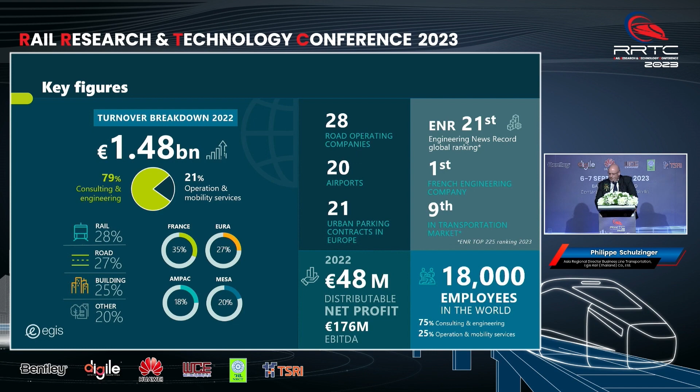In terms of Egis's global offer, we can service our customers and work with partners for the full life cycle of any project related to transport infrastructure, urban development, and energy and industry. So from feasibility studies toward the full implementation of a project, and as I said earlier, in terms of operation and maintenance, we provide services too.

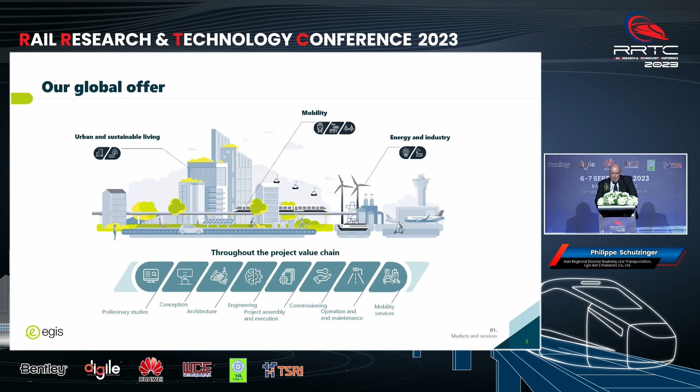In terms of our local footprint in Asia Pacific, we are present in Asia since 1955, and today we have about 2,000 employees in the region. What is very important for us in relation to Thailand is that Thailand is our transportation regional hub. We've been present here for more than 30 years, with about 120 staff working mainly in rail and civil infrastructure works. We also have a team developing MEP and urban architecture activities.

What's important to know is that for Thailand, we are a regional hub, but also, for the rail and civil activities, since last year we've provided more worldwide support for Egis Group. So today we are supporting regions like the Middle East, Europe, and also Latin America from Bangkok. Roughly 80% of our staff in Thailand are from Thailand, and the remaining 20% are of different nationalities, bringing different experience.

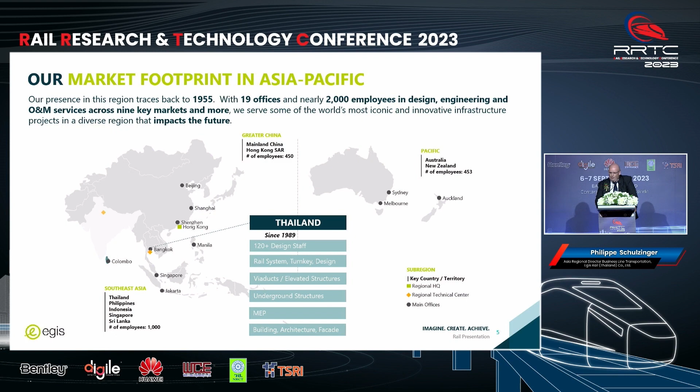So in terms of LRT systems, I wanted to share what LRT is, what the different advantages are in terms of system, how we break down the different components, and also share some experience about operation and maintenance.

First, the objective of an LRT system. I'm sure many of you know these pictures about the representation and comparison between cars, without cars, and a tram for transporting, for example, 200 people. If you see the picture on the left, 200 people is about 177 cars on average, representing quite major traffic. On a light rail train, shown on the right, if you put this same amount of people, in terms of footprint and transport capacity, it makes a big difference.

So the objective of the LRT system is to reduce the number of cars in the city, meaning reducing pollution, reducing noise impact, and of course reducing the time for people to commute from point A to point B. It will also improve the quality of living in the urban environment in terms of accessibility for people moving, and in terms of social and economic benefits. Transport quality will also be improved in terms of reliability, speed, comfort, and capacity.

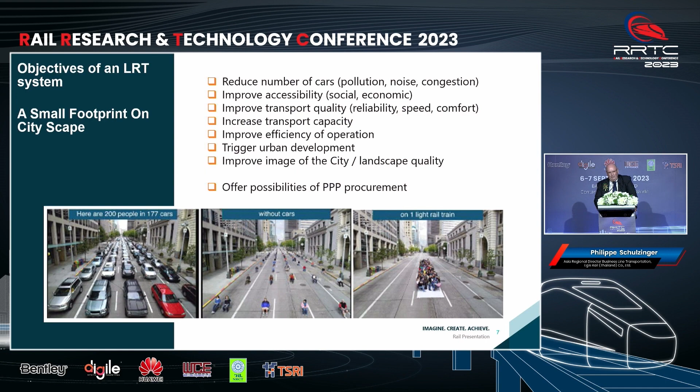In terms of characteristics for segregated systems, you can see on the two pictures that with the segregated system we can increase speed for the transport. It will also give priority in traffic, so it will be more reliable in terms of timetable for the tram. In terms of capacity, it will improve the headways, and we can provide longer vehicles on a segregated corridor. Again, in terms of attractivity, it's more accessible, silent, and part of a network in terms of connectivity.

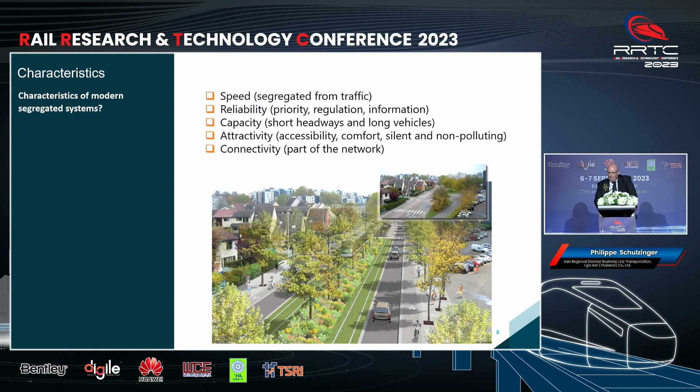Also interesting to acknowledge is energy efficiency, comparing tram with diesel bus and electrical bus. Studies comparing similar passenger capacity show that energy for tram is still more efficient per passenger versus diesel bus. You can see the graph in the middle showing energy consumed for acceleration and cruise energy, and also for electrical bus. This can be explained mainly by the coefficient of resistance comparing a steel wheel on steel rail with a tram versus rubber tire on roads.

So in terms of energy, that's the point we need to bear in mind when we look at mobility and transport planning for Thailand, also with a target of decarbonization and energy efficiency.

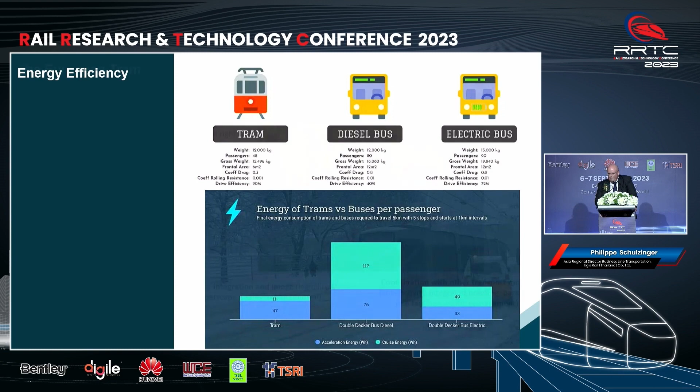We have public address systems in the different tram stops, and typically in Europe it's quite connected with other transport modes. In terms of ticketing, we have cities using the same fare collection system from tram to metro to bus.

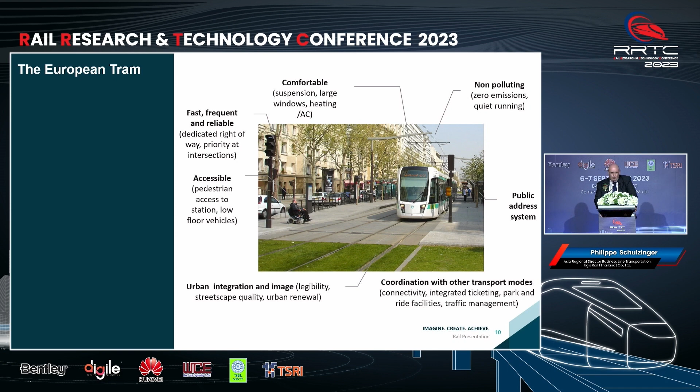In terms of typical components, we can break it down into three components. The first is infrastructure, which can be fully or partly segregated, and we can have any type of infrastructure in relation to the tram—at grade, underground tunnel, or elevated. The second component is rolling stock, which determines capacity, performance, comfort, and also reflects the image of the city through its design. Then we have the rail systems, which provide information, telecommunication systems, mainly traction power systems, and the track and signaling.

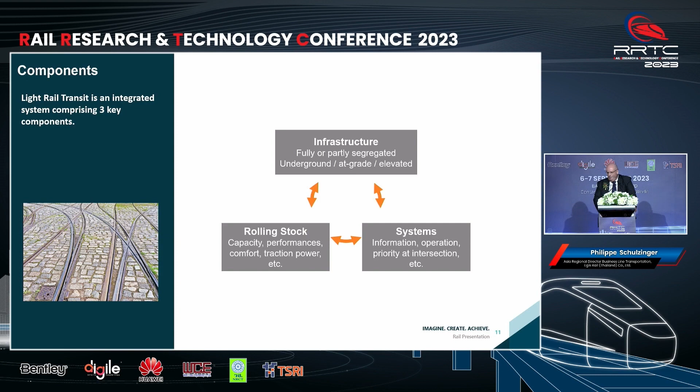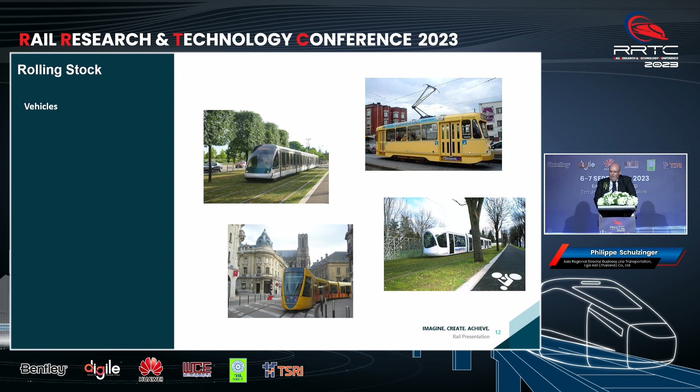In terms of rolling stock, typically rolling stock manufacturers can propose many types of design. You can see different images here showing completely different designs. The particularity of rolling stock, typically for LRT, consists of modular sections, so it's quite easy to extend the capacity of a fleet by adding several modules when the operator or concessionaire of a line decides to increase capacity due to increased demand. So it's a modular composition.

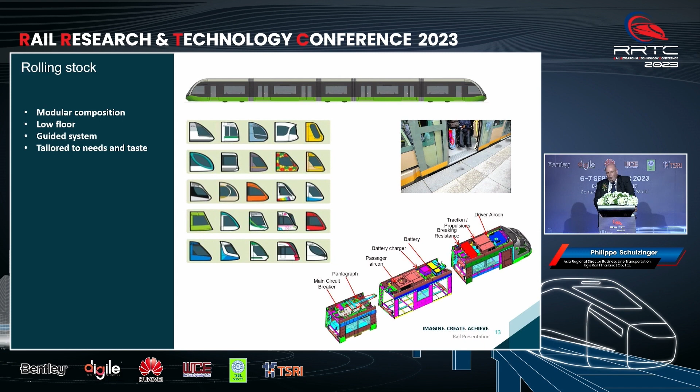In terms of modularity, we can go from short tram to longer tram. Typically, 20 meters is roughly the length of a basic tram, and by adding different modules, we can pass from 20 to 30 or even 40 meters, increasing accordingly the capacity of passengers, from 140 passengers per tram up to 300 passengers, for example.

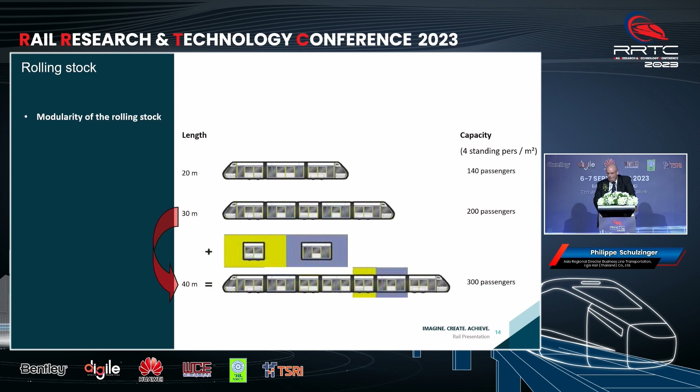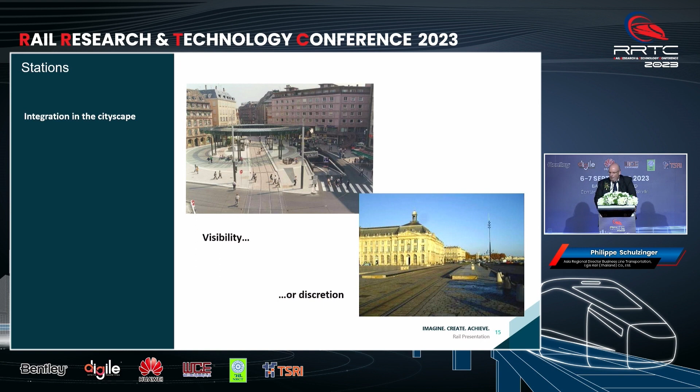Again, the access between the platform and the tram, because it's a low floor, is quite straightforward. We have some typical constraints in terms of gradient, but it's quite flexible in terms of gradient in stations.

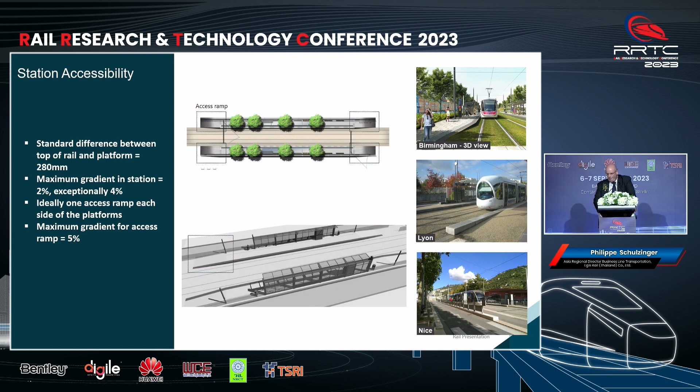And for access ramps, we can put access ramps on the side. You can see on the graph at the bottom, to have people with, for example, disability who can access the platform easily. Again, station accessibility, some examples - we can have a ramp also coming out from the tram.

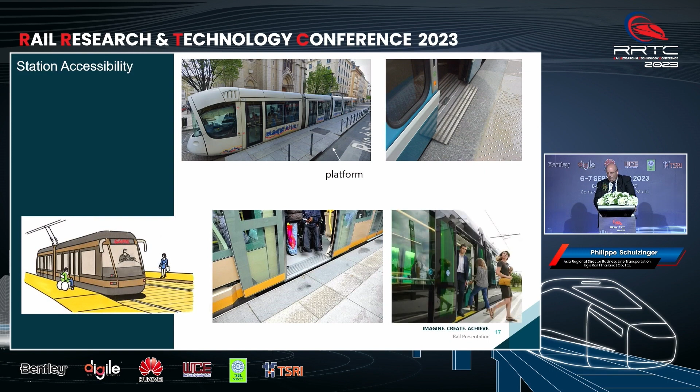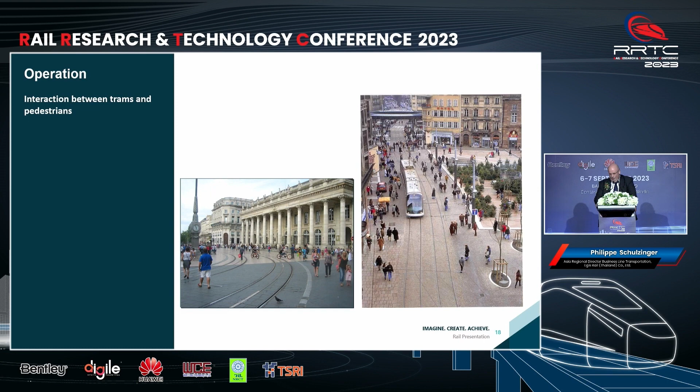In terms of operation, what is often the challenge is interaction between the tram and pedestrians, because the track is embedded and the system is embedded into the urban environment, and people can cross the track if it is integrated with the roads, like we can see here. So this is important to acknowledge.

In terms of system, we have different approaches that we can implement. For efficiency of operation, the traffic priority is the best approach for tram systems, meaning that when there is a road crossing with the tram, there is a system of signaling with mass detection that will trigger the road traffic to stop the car traffic, prioritizing the tram's arrival. That helps for the mass transportation.

Typically, we have one OCC taking care of the full network of the full line. For security, we have a metro-line-like CCTV system, and we also have a PA display, etc. And for passengers, access control and ticketing can be made with any type of control - it can be at the tram stop or on board the tram.

In terms of environment, it's quite friendly, zero emission, with limited noise and vibration impact on the environment. Typically, if we use overhead catenary, we have technology to have a specific design to integrate the overhead catenary into the environment. Or even now we have solutions with no overhead catenary - on batteries, or with a charging point, or feeding electrical system through the ground, like in Bordeaux in France.

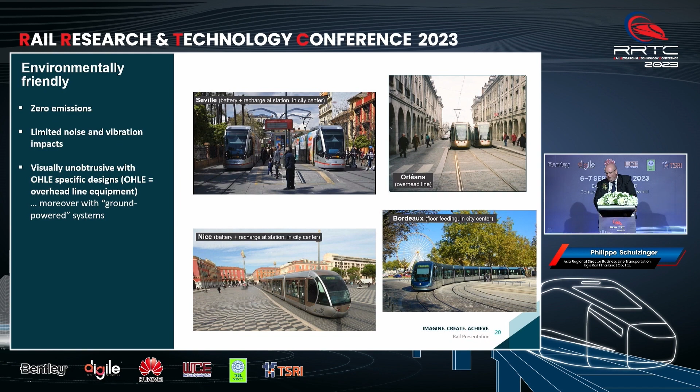So in terms of typical urban integration for the track itself, the track corridor, in summary we have five typical options, and I'll show some examples. Here you see the different configurations - the one in Saragossa is on battery with a charging station at the tram stop, so no catenary. And the one underneath is from Bordeaux, with no catenary and power fed through the ground.

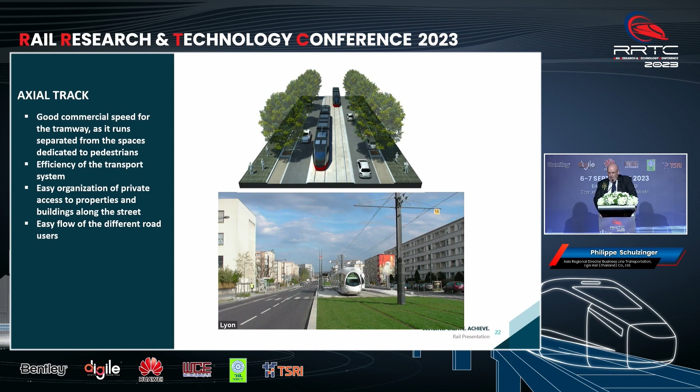Axial track is maybe the preferred one, depending on what can be done physically in the city. It provides a good commercial speed because it's a segregated corridor for the tram. Pedestrians use the side walkway on the other side of the road, so there's less risk of pedestrian crossing or walking on the track. It's easier for the organization of maintenance and operation because of the segregation, and it's an easy flow of the different road users, because for crossing, it's more straightforward with a crossroad.

When you have lateral tracks, both tracks are on one side of the road. This can be okay if you have one-way car traffic, it will be better. It's also feasible and easier if you don't have too many private accesses on the side. One of the inconveniences is you will have to accept low speed because you'll have pedestrians walking next to the track.

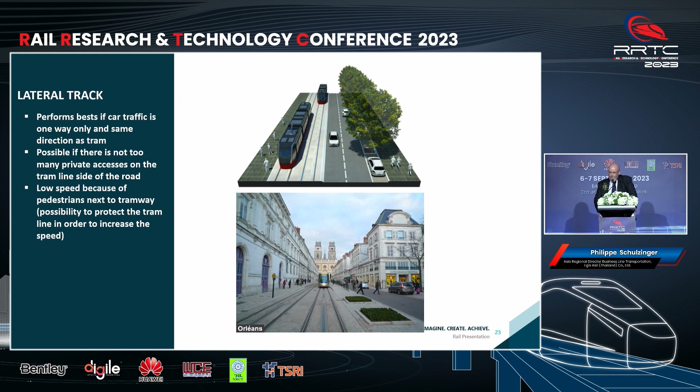Then you have bilateral track options, which is not very ideal for operation because you have to operate and access separate tracks for maintenance. It's possible where you don't have too many private accesses on both sides of the road. Again, you will have a lower speed than a segregated corridor because of pedestrian interaction.

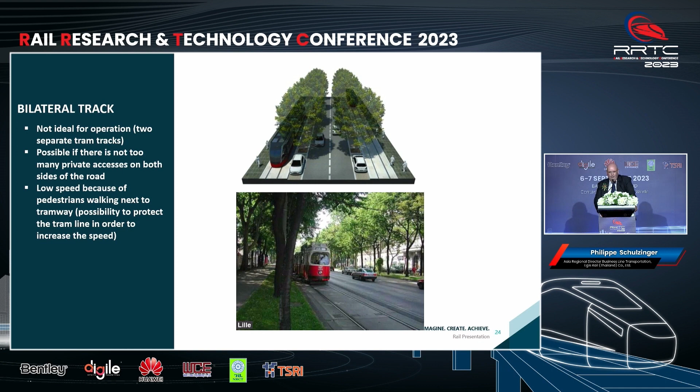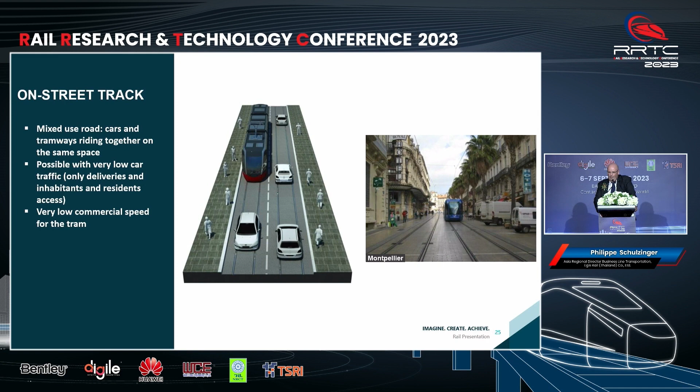Then you have the on-street track that sometimes we cannot avoid. It's where you have mixed use between the car and the tram using the same corridor. In this configuration, you are like a bus, dependent on the road traffic. It's good when you have low car traffic, otherwise you don't have the advantage of the tram anymore, and the speed will be much lower because of this interaction with the cars. You also have pedestrians on the side.

Finally, split tracks. It's very rare, but it can happen, where you have physical constraints in terms of space for the corridor, and it's not possible to have the two tracks running in the same street. It's not ideal, obviously. It might be a solution when you have very narrow streets. It's more expensive because you will have to build the system on two different streets, so you cannot optimize the works. It's like two sites, and not ideal for operation again.

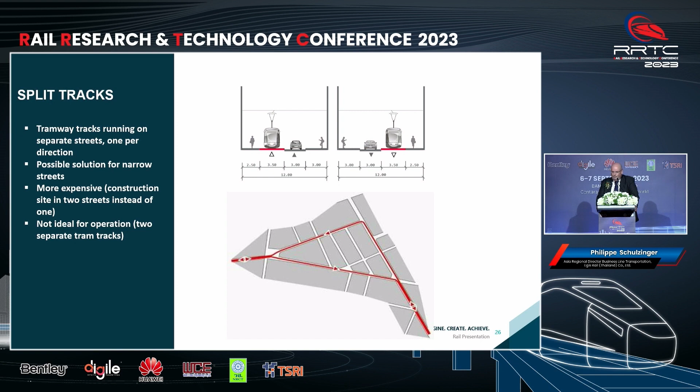In Europe, where we have cities with a lot of utilities in the ground, when you build a tram you have to relocate the utilities. Depending on how these utilities have been built in the past and recorded on drawings, it can be very challenging in terms of construction. I know also, for instance, in Australia, for cities like Sydney, for the Sydney light rail, there was a major challenge related to utility relocation in the city, especially in George Street, because of a lack of accurate information.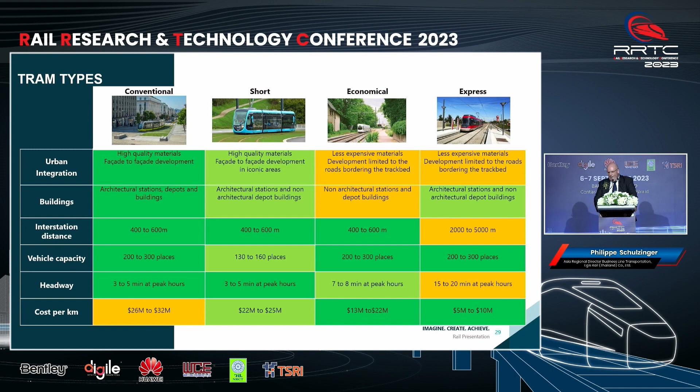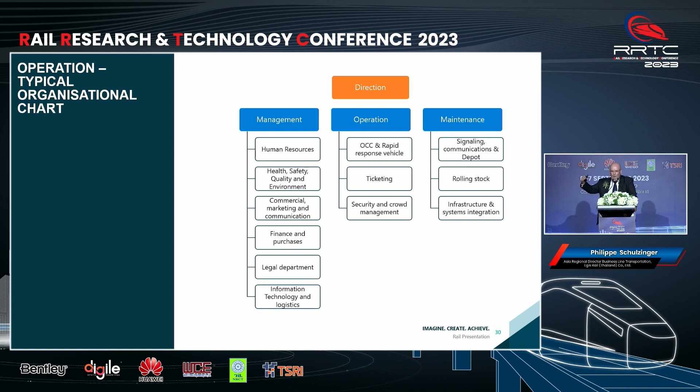In terms of operation and maintenance, typical organization is 3 pillars: one related to management, shared function or transverse function like human resource, health and safety, environment, financing, legal, etc. One pillar related to operation, with the control center, management, ticketing, and security. And one related to maintenance, with different teams for the different type of system.

Here I wanted to show you an example, for Parramatta Light Rail in Sydney, which consists of 12 kilometers of dual tracks, 16 stops. They have overhead line equipment with some catenary free zones. It's a 44-meter long vehicle. There is one depot, one OCC, and there is a backup. You see the organization chart of the operation and maintenance concessionaire.

So you find again on the right the operation management pillar. Then from right to left, the maintenance pillar, here called head of asset management, with a team for the different maintenance of the system and infra. And then the other soft skill or soft organization related to HR, safety, customer relation, and the commercial, including finance, etc.

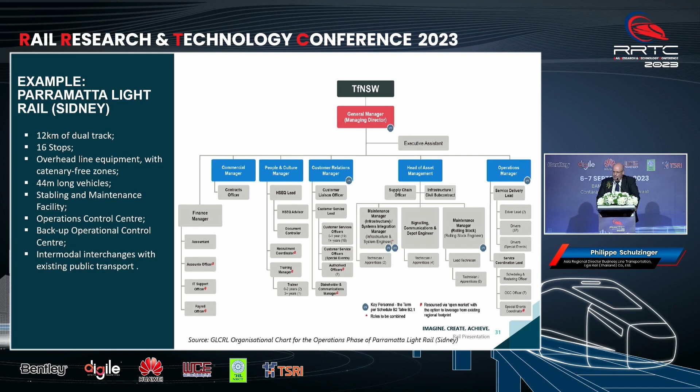In terms of operating costs, we can break down into 4 main aspects. The first one is related to personnel cost. The second one for spare parts, supply, and insurance. Third, energy. And the fourth, structure costs. To be noted that in France, the average operating cost for a tram is around 7-8 euro per vehicle kilometer.

Now, in conclusion, I wanted to emphasize on 5 pillars, or the 5 key success factors for implementing a tramway in Thailand. The first one is in relation to government support and policy alignment.

I think it's important to have an organization like RRTC today that is there also to harmonize and coordinate between authorities and private sectors to have this type of alignment. This shall ensure proper process, proper robust standard for tramway, proper process for procurement, also in terms of land acquisition, land use—all these policies that need to be defined in advance.